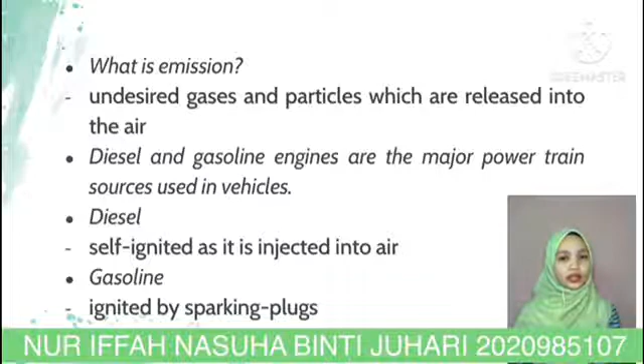The fuel is self-ignited in a diesel engine when it is pumped into air that has been heated by compression. The petrol is ignited in gasoline engines by sparking-plugs. The fuels used in diesel and gasoline engines are both distinct, with diesel fuels comprising the higher boiling range of petroleum fractions. Because of its higher density, a liter of diesel fuel produces nearly 13% more energy than a liter of gasoline. My name is Syafiqah Binti Paimen.

I want to talk about sources and process of emission from gasoline and diesel engine vehicles. Source of emission from gasoline and diesel engine vehicles. The first source is the engine exhaust. The exhaust pipe discharges burned and unburned hydrocarbons, carbon monoxide, oxides of nitrogen and sulfur. The diesel exhaust gases are primarily composed of carbon dioxide, water, and the unused portion of engine charge air. The crankcase is a secondary source of unburned hydrocarbons, and to a lower level, carbon monoxide.

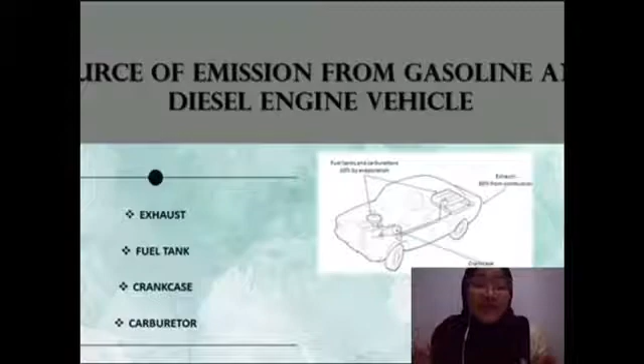Next, in the fuel tank and the carburetor, hydrocarbons are continually evaporating from gasoline, constituting a minor but not insignificant contributing factor in pollution. In the crankcase, the portion of the engine block below the cylinders where the crankshaft is located, leaked combustion gases are combined with ventilating air and returned to the intake manifold for reburning in the combustion chamber.

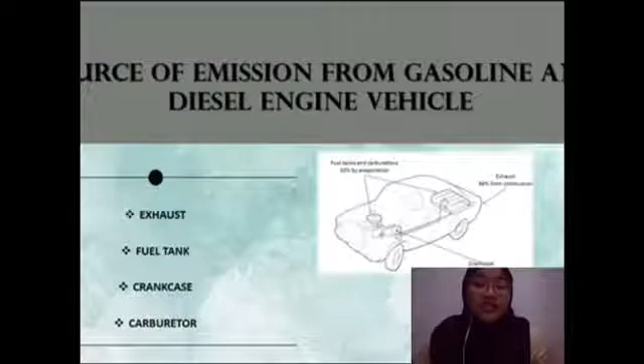The pollutants originate from various non-ideal processes during combustion, such as incomplete combustion of fuel, reactions between mixture components under high temperature and pressure, combustion of engine lubricating oil and oil additives, and also combustion of non-hydrocarbon components of diesel fuel such as sulfur compounds and fuel additives.

Process of emission from gasoline and diesel engine vehicles. Gasoline and diesel operate on the same four-stroke cycle. Suction: the intake stroke where the piston descends, sucking air into the cylinder through the open air intake valve as fuel is injected. Compression: the compression stroke where the valve closes and the piston goes back up the cylinder to compress the air and fuel mixture.

Power: the power stroke where the mixture is ignited to force the piston back down the cylinder. Exhaust: the exhaust stroke occurs when the ignited fuel and air mixture is pushed back up the cylinder by the piston through the exhaust valve.

Diesel engines are more efficient than gasoline engines because diesel is comprised of more long chain hydrocarbons, which have more energy compared to gasoline. The diesel engine is an auto-ignition engine in which fuel and air are mixed inside the engine. The air required for combustion is highly compressed inside the combustion chamber. This generates high temperatures which are sufficient for the diesel fuel to ignite spontaneously when it is injected into the cylinder.

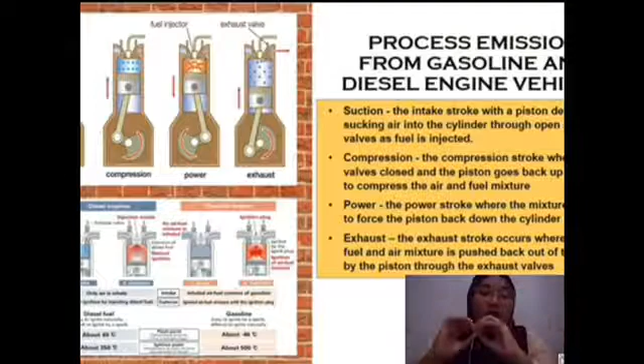Diesel engines use fuel injectors because diesel does not properly mix with air. However, if atomized diesel is sprayed into high temperature, spontaneous combustion will occur. Meanwhile, gasoline engines use a spark plug; gasoline readily evaporates, so it gets mixed with air efficiently. As a result, just a spark is sufficient to produce smooth combustion in a well pre-mixed gasoline engine.

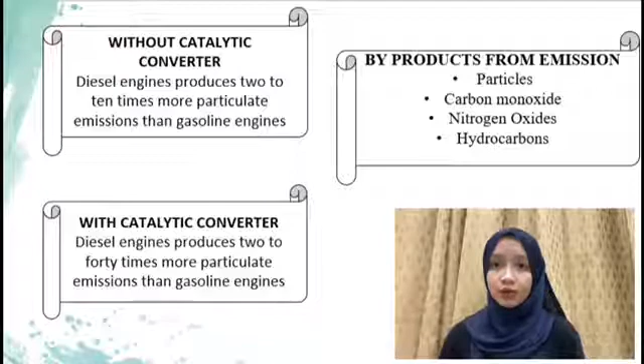Hi, my name is Hanim Binti Ahmad Sofian, and I will explain about the emission from gasoline and diesel engine vehicles. Diesel and gasoline engines are the major powertrain sources used in vehicles. Both are internal intermittent combustion engines. Diesel engines produce 2 to 10 times more particulate emission than gasoline engines without catalytic converters of comparable power output. However, with a catalytic converter, diesel engines produce 2 to 40 times more particulate emission than equipped gasoline engines. There are 4 main pollutant emissions, including particulate matter, hydrocarbon, carbon monoxide, and also nitrogen oxide.

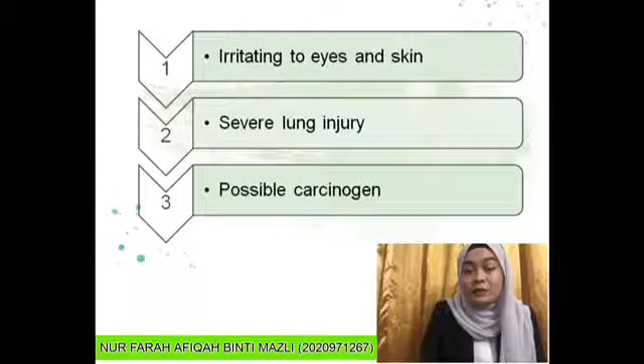My name is Fatin Atiqah Binti Adnan, and I will explain the effect of gasoline and diesel usage towards the environment. There are 4 effects of gasoline and diesel usage towards the environment that I found. First, it will contribute to air pollution. It is from the vapor given off when gasoline evaporates and the substances produced when gasoline is burned.

The vapors that might contribute to air pollution are carbon monoxide, nitrogen oxide, particulate matter, and unburned hydrocarbons. These vapors come from consumers who use gasoline in their cars, light trucks, watercraft, small aircraft, and landscaping and construction equipment. Second, it will contribute to the greenhouse effect.

Each gallon of gasoline burned will create 20 pounds of greenhouse gases. When the greenhouse gas emissions from gasoline increase, they build up in the atmosphere and warm the climate. This is because the build-up of carbon dioxide and other greenhouse gases such as methane, nitrous oxide, and hydrofluorocarbons is causing the Earth's atmosphere to warm, resulting in changes to the climate.

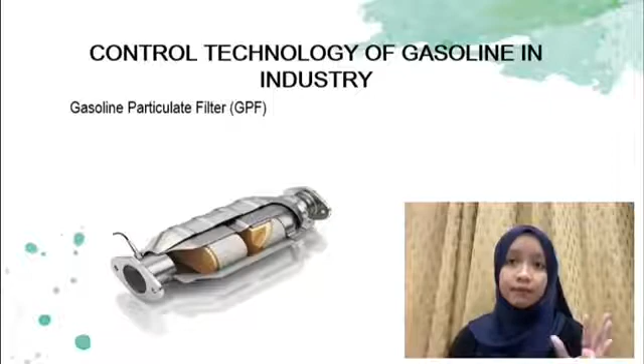Next, a control technology of diesel engines in industry is the diesel particulate filter or DPF. For your information, this technology has been applied in the production of vehicles since the year 2000. It is used to remove particulate matter emission from the exhaust gas by physical filtration and is usually made of either cordierite or silicon carbide honeycomb structure monolith with channels that are blocked at alternate ends.

Last but not least is selective catalytic reduction (SCR). It is a technology used to reduce nitrogen oxide emission, especially for heavy-duty vehicles. Nowadays, it is being developed for light-duty passenger vehicles, and a few light-duty vehicle manufacturers such as Audi have been using this technology in their automobiles. Moreover, SCR minimizes nitrogen oxide emissions in the exhaust gas by utilizing ammonia as the reductant.

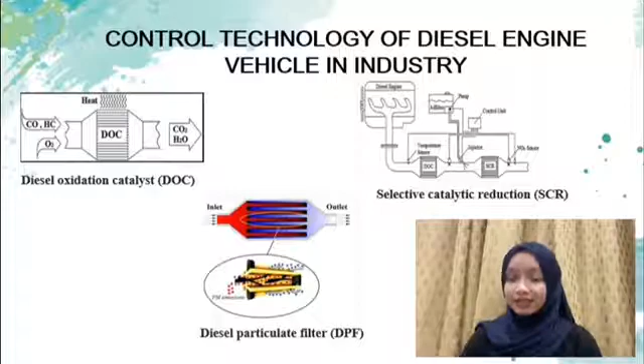For the conclusion, restricted supplies of liquid fuels and the prevention of toxic pollution associated with the combustion of these fuels, as well as foreign competition, are the key factors in the recent rapid production of motor vehicles. The key developments in the construction of vehicles and their engines are currently decided by the criteria of the provisions on the elimination of toxic exhaust gas emissions and carbon dioxide emissions.

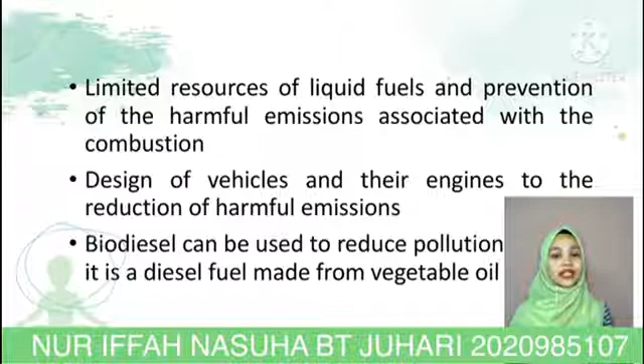One of the solutions to mitigate this is the use of biodiesel, since it is a diesel fuel made from vegetable oil, which is free of sulfur in its pure form and eliminates particulate matter when used.